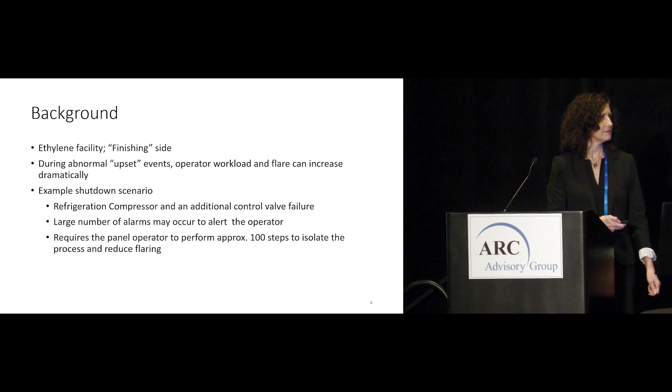I don't think that mic's on.

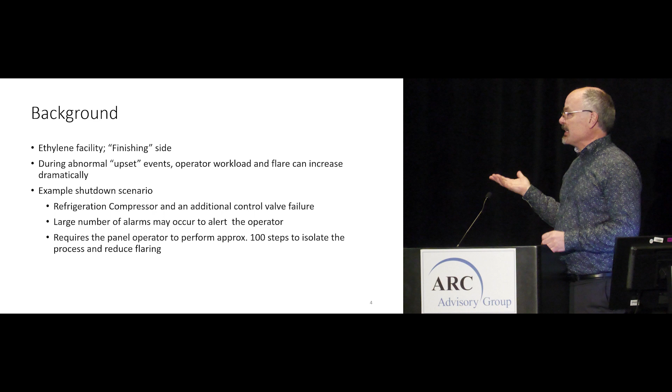So it was in our ethylene 2 facility on the finishing side, and our measure was flaring. The simulator does measure flaring for us, so that's what the basis of the study was about. Our scenario was the propylene refrigeration compressor trip, which can take about 100 moves. And also we failed a control valve open a little bit, so that's what they had to detect after they responded to that. And there's lots of alarms that come in, of course. I'll cover that a bit more in the next slide. I mentioned there's 100 steps, so we can go ahead one.

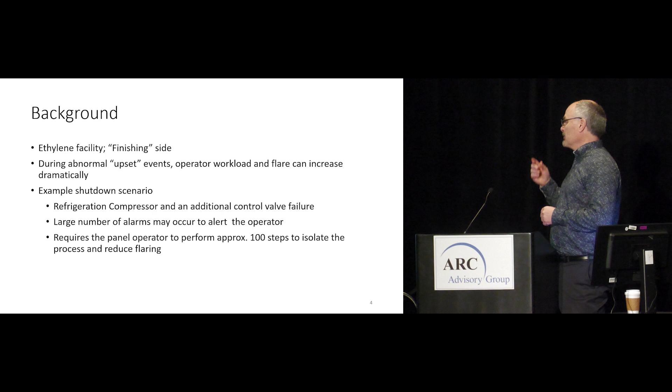I think you might have skipped one. Okay.

So the alarming states we used: we picked no rationalization. I just added 100 alarms after you got 3 or 4 pages. I could have added more, but I think we got the point. The rationalization is the normal alarming that we use in the unit, and that's been set for steady state operation, so we don't give the operator an alarm flood for certain situations. On this propylene refrigeration trip, it brings in 150 alarms when that machine goes down, because the whole process goes down. And then we developed a state on the simulator, smart alarming, so when we knew that this trip was happening, it would only bring 5 alarms.

And we could have reduced that. We just tried to come up with a kind of constant number, so it was around 5. And the automation, the Safe Park application, does 100 moves, and it can reduce the time that it takes to isolate the process down from 20 plus minutes to 5 minutes. And of course, we used the high fidelity simulator for this as well.

Okay, so again, we were looking to quantify the effects of alarm design and Safe Park automation in terms of human performance. Nova provided the simulation. Embry-Riddle researchers, including myself, provided the experimental design and the statistical analysis. The hypotheses were very straightforward. We expected the panel operators to have lower perceived workload and perform better, i.e. have less flare, when using the Safe Park app, so when using automation, than without. And also that the operators would have lower perceived workload and less flare when given rationalized and state-based alarming than without.

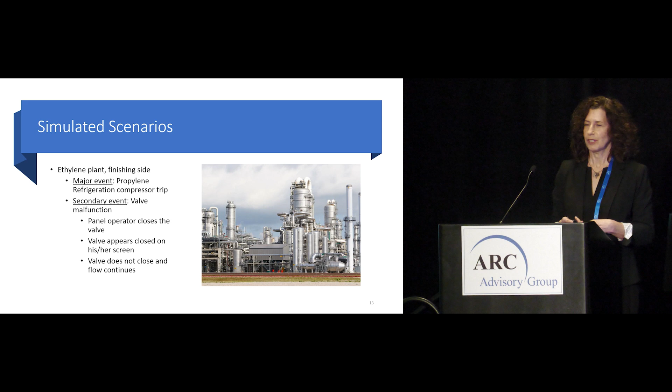All right, so the simulated scenarios, back to Ron here. So I think I mentioned that propylene refrigeration compressor trip was the main event. The secondary event was valve malfunction, and the steps were the panel operator or the application would close the valves. The operator doesn't know which one hasn't closed, that it is passing. It fails to close all the way. And it looks closed on the screen. We can go to the next slide here.

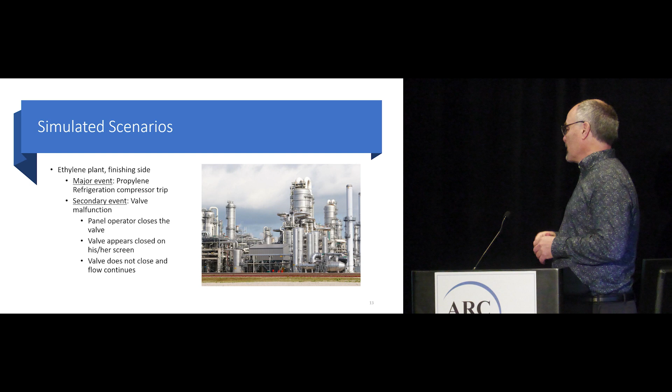Yeah. So this is an example of one of the malfunctions. We have an ethane storage drum, that flow controller 101 there. It would be shown closed on the graphic after the operator or the application closed it. And what the DCS shows is the output is 0, but actually the valve position was 24% in this case. And we don't have feedback from the valves necessarily, not on most of them anyway.

So it would continue to flow into the exchanger, and eventually a high-level alarm would come in. Usually 2 alarms came in from different systems if it went on long enough. So that was the operator's key. They didn't know which system or graphic the problem might be on. So typically they were looking for alarms, and sometimes they were scanning graphics after they were completed.

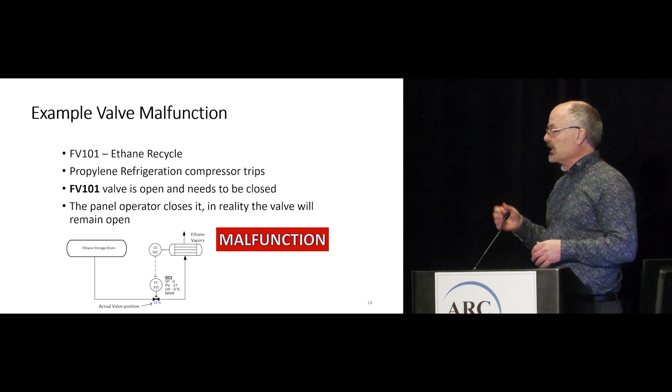Okay, so as I mentioned, the experimental design yielded 6 separate scenarios. And part of the art in scenario design is to have equivalent but different, right? So in aviation that I work with a lot, you want pilots to practice landing, but not always at the same airport, so let's have them practice landing at Daytona Beach, and then have them practice landing at, I don't know, Ormond Beach somewhere, and so forth.

So we had one scenario per experimental condition, but we had to have different scenarios for each of those conditions, right? But equivalent in difficulty. So we don't want to accidentally, we're talking flight again, have one scenario where they land at Ormond Beach, and then another scenario where they land at Orlando International, right? Because Orlando International is a lot more complex. Okay, so we're avoiding that.

The panel operators, again, performed all of those scenarios, so all of the conditions, but in a different order to avoid learning effects and fatigue effects and so forth. So some people may have performed scenario A, B, C, D, E, F, and another person maybe performed, you know, D, A, F, E, C, right? So different order.

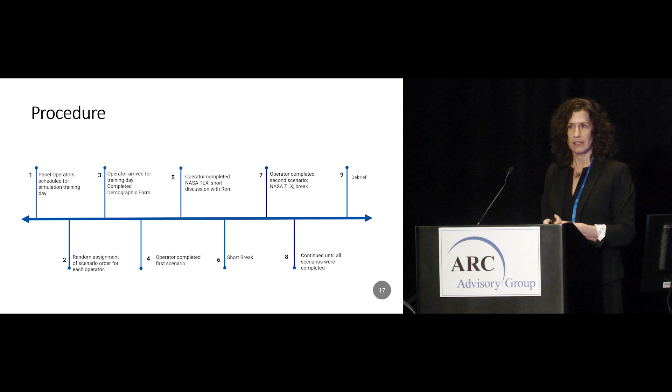After their first scenario, they completed the NASA TLX, had a short debrief with Ron, and then took a break. And then they would move on to their second scenario, rate their perceived workload with the TLX, have a debrief, go for a break, and so forth. So this ended up taking a full day, about 8 hours.

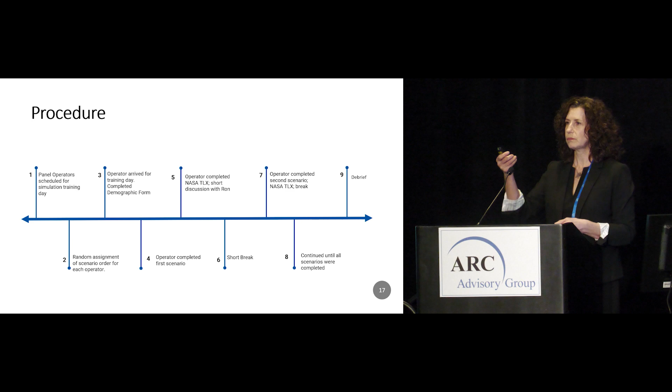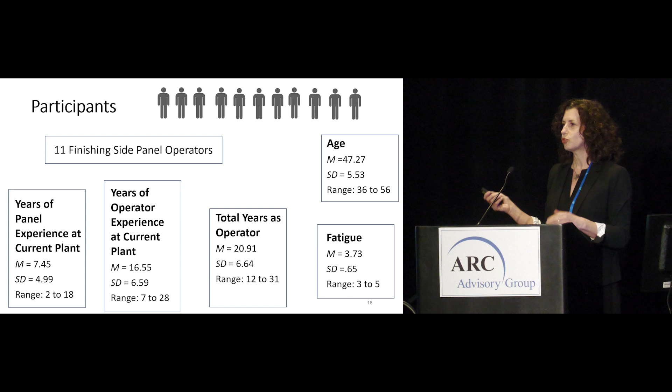They were in their late 40s, some mid-30s, some mid-50s, and then fatigue. We had them do a short fatigue rating when they began this in the morning, and it was about average. The scale was 1 to 5. So, the results.

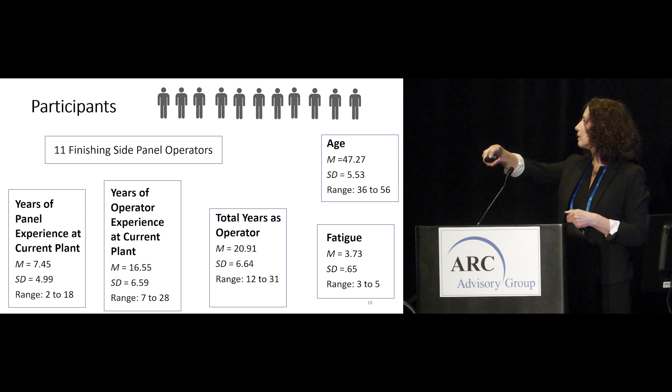Okay, so for the statisticians in the room, we did do a multivariate analysis of variance with the 2 dependent variables, again, being perceived workload and the flaring. And then follow up univariate test and pairwise comparisons.

Okay, so this next is going to show you the means. I know, you're in suspense.

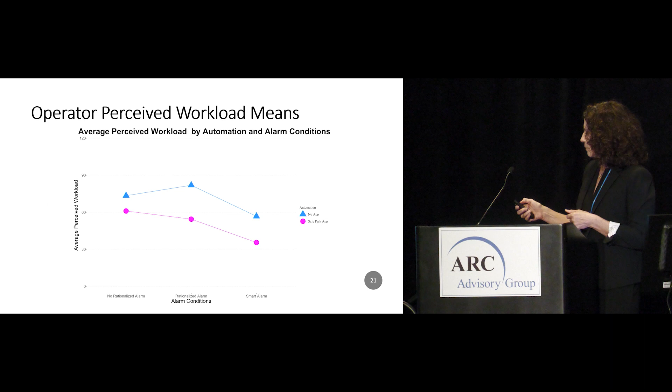What is going on? Okay, so this is for perceived workload. And as you see, the pink circle line are with the Safe Park app, and the blue triangle line is without the app, and then these are for the 3 types of alarming schema. So here we have the no, the rationalized, and then the smart alarming. And we like the way this is looking here.

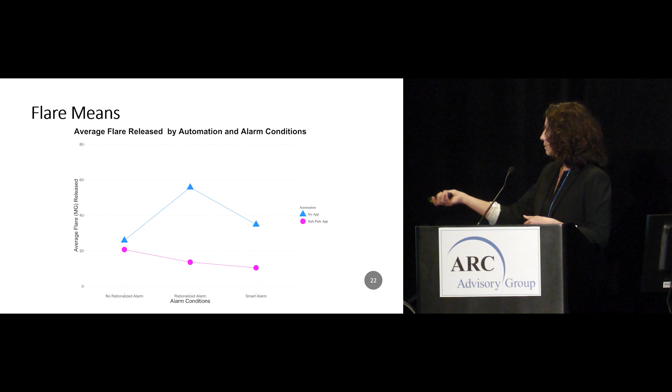And we did end up with 2 significant main effects for automation and alarming, but not a significant interaction, for the stats people in the room. So follow up, both the alarm independent variable had a significant effect on workload and flare, and the automation had a significant impact on workload and flare, but again, no interaction. And so this is what that looks like.

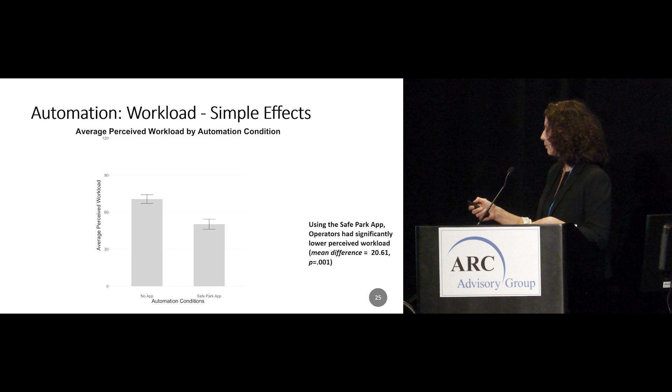So alarm schema aside, as you can see here, with the Safe Park app, the operators had a significantly lower perceived workload than without. So the automation is doing its job in terms of lowering the operator workload. For flare, again, with the Safe Park app, significantly lower flare released compared to without the app.

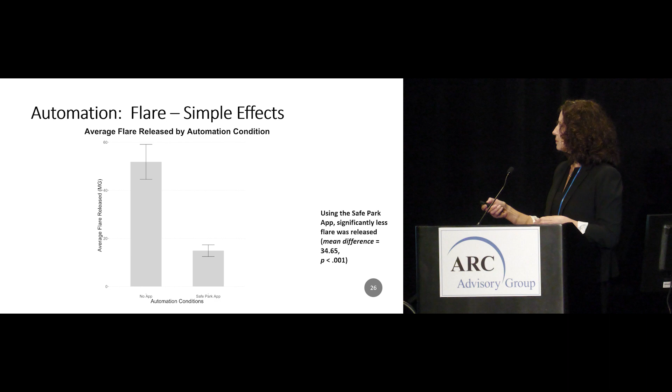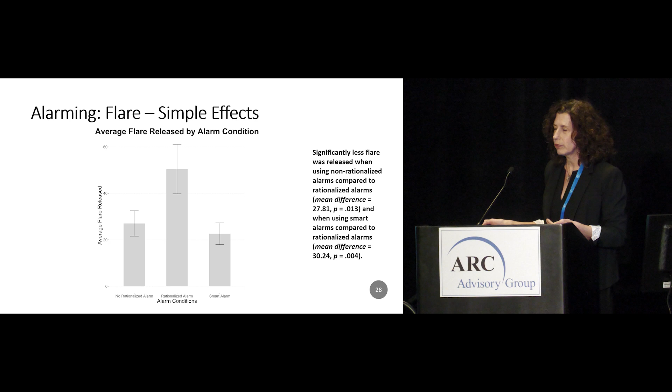And then flare was also a little odd. So in this case, there was a significant difference, but for some reason, this rationalized alarm had the highest flare. Okay, so what did we think of these results?

So again, the purpose was to use a human-in-the-loop simulation study with upset scenarios and look at the effects on perceived workload and flare. There was a clear effect of the automation of that Safe Park app with lower perceived workload and less flare when operators had access to that app. The alarm design revealed mixed results. So there was lower perceived workload for smart alarms. But then the flare in both the smart alarm and the non-rationalized alarm were about equal.

And so the question is, what happened in that one condition? And what we think is that one scenario in the condition where it was a rationalized alarm and no automation, that somehow it was inherently more difficult. Something was different about that one scenario, and Ron can also talk more about that.

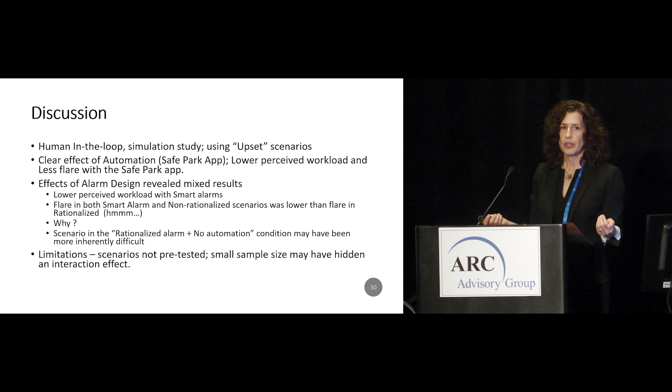So limitations of the study, the scenarios we did not get to pre-test to see if they were equivalently difficult, right? And then also we had a very small sample size, which may have hidden some interaction effects.

Overall, the prior research on alarm design does not typically, if ever, include human performance data, because to do this, we had to have a high fidelity simulator, and many companies do not have those, many organizations do not have those, so it was really awesome to be able to work with NOVA that has one and is using it actively and keeping it up to date and all of that.

Again, clear evidence that the Safe Park app is reducing workload and flare. Future research is needed to refine scenarios for alarm design tests, right? We still believe our hypothesis is correct, but something happened in this study.

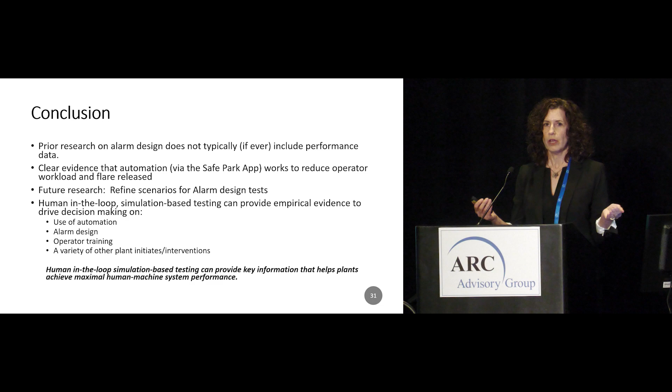And I just want to reiterate what Ron was saying about the benefits of human-in-the-loop simulation, that organizations can use them for all sorts of things, and ultimately using human-in-the-loop simulation-based testing can provide organizations both understanding of what's going on, and then in turn, how to make sure we're achieving maximal performance of our human-machine systems. And that's all. We actually do have a published paper discussing the study in detail if you're interested.